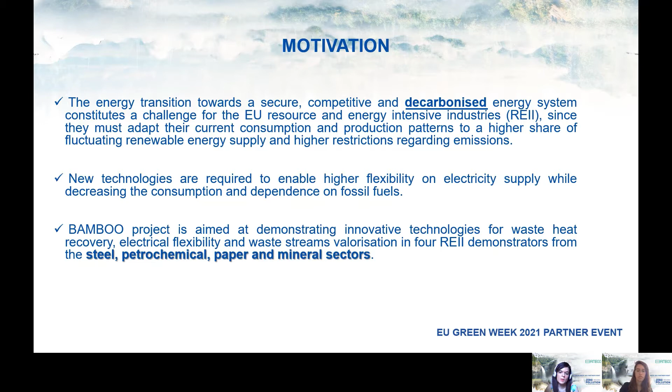In this sense, Bamboo project is aimed at demonstrating different innovative technologies for waste heat recovery, electrical flexibility, and waste streams valorization. We are working in 4 energy and resource intensive industries, including the steel, the petrochemical, the pulp and paper, and the mineral sectors. So how does Bamboo project contribute to decarbonization? We are working in 3 innovation pillars: waste heat recovery, electrical flexibility, and waste streams valorization.

The first one, waste heat recovery, includes the demonstration of different technologies to valorize waste streams because they have a certain temperature, so that we can valorize them and use them where they are required in other parts of the process.

The second innovation pillar is electrical flexibility, to offer industries the possibility of taking advantage of lower electricity prices and potentially provide grid services, as well as enable the integration of renewable energies in the grid.

The third one is waste streams valorization. We work on different technologies and processes for the valorization and upgrading of waste streams that have a certain calorific value, so they can be used as fuels in other processes in the plant.

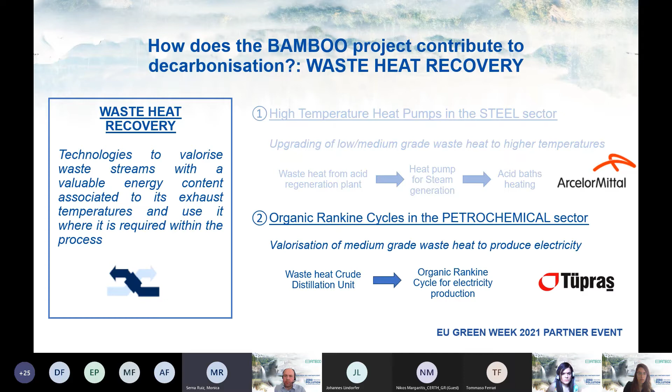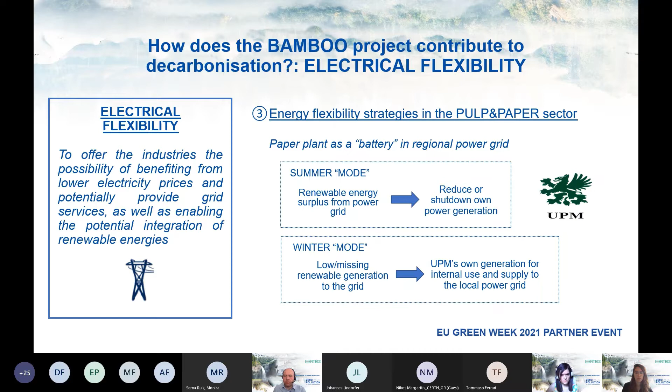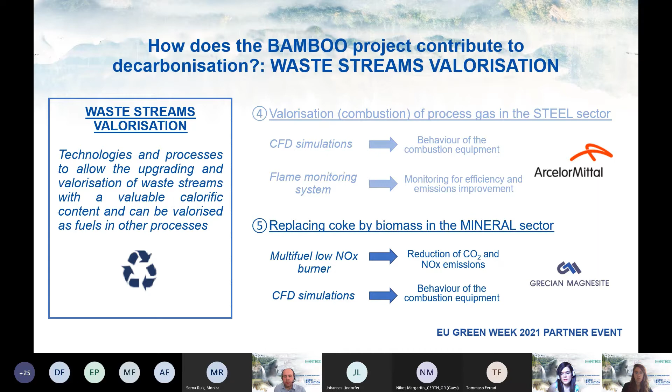So this is more or less an overview of the different technologies and demonstration activities developed in the project. Today we have two sessions for subscribers to further understand what we are developing in the project.

In the morning session, our expert speakers from the Austrian Institute of Technology, Turboden, Technical University of Braunschweig, Certh and Circe will explain how these technologies work and how they can contribute to the decarbonization of energy and resource intensive industries. During the afternoon, we have a second session where our industrial partners will explain their experiences and the successful cases being developed in this project.

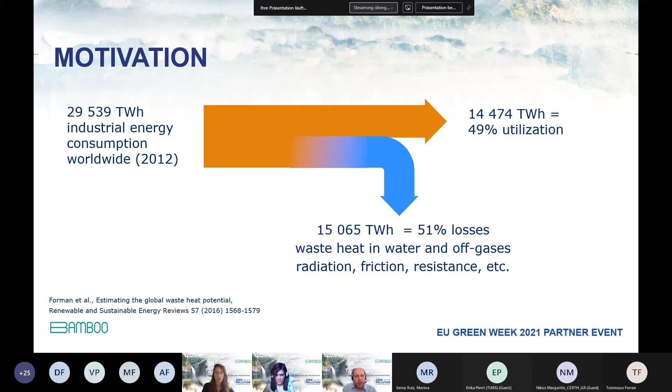What you can see on this slide is data from 2012, from a study done some years ago. What we are doing is using this low temperature heat, bringing it to a so-called high temperature heat pump or industrial heat pump, using a little bit of electricity to lift the temperature of the low temperature heat to a level where it can be used again in the industrial process. That's the general principle, and it's somehow a circular energy use.

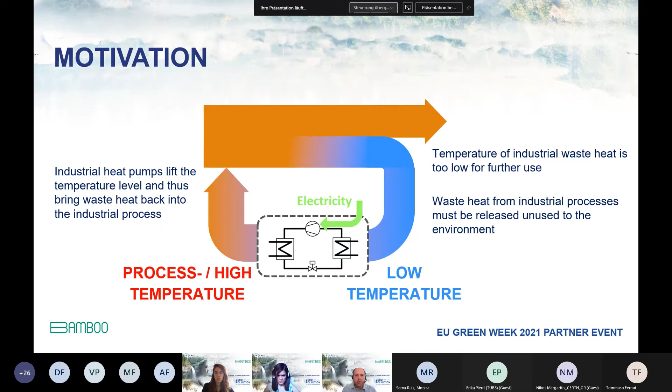What you can do with it is save CO2 emissions, save primary energy, and at the end save money. The challenges we are facing are divided into two main areas.

The ongoing development of industrial heat pumps and the demonstration and training of it, coming to the principle of a so-called compression heat pump. There are different names: industrial heat pump, compression heat pump, or high temperature heat pump - it's always the same. On the left-hand side, you can see the low temperature waste heat, which is given to a working fluid.

This working fluid, also called refrigerant, is then evaporated and compressed in a compressor using electrical energy, brought to a high temperature and high pressure, where the heat is given to the process heat and can be used again. This is a so-called closed circuit, as the refrigerant is brought back to the evaporation process - that's the principle we've been working on for some years.

The other challenge is for our future process heat supply, we have different requirements. The process heat supply in the future will need to be more efficient, also according to European regulations. We have to decarbonize the process heat supplies, and this decarbonization comes mainly with electrification. I will come back to this point with statements from some studies.

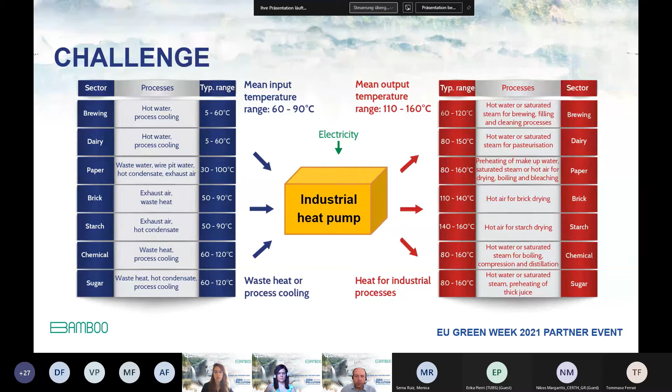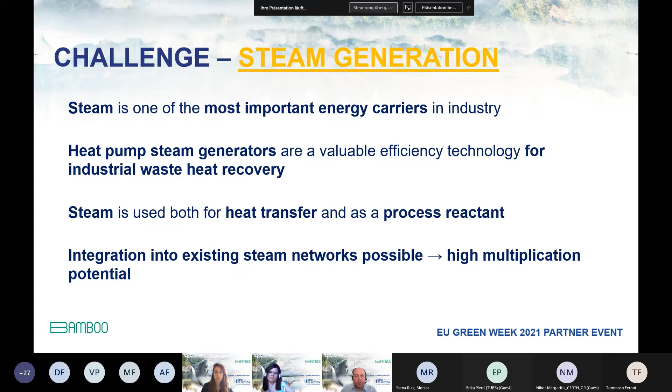First of all, the steam generation. So why heat pumps for steam generation in general? This is why steam is one of the most important energy carriers in industry. It can be used for heat transfer as well as process reactant. And you mainly have existing steam networks where you can integrate high temperature heat pumps, where you have a high multiplication potential. That's for steam generation.

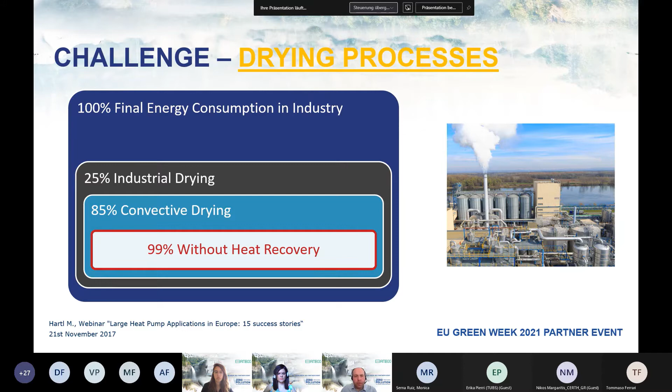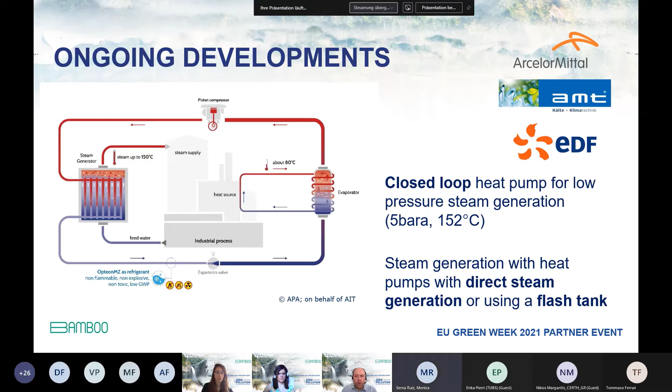I'm showing this to you from the project DryEfficiency, which deals with the efficiency of drying processes up to 160 degrees C. These two technologies are used, and in parallel we see the market for closed loop heat pumps developing, now reaching up to around 120 to 130 degrees C supply temperature. So there's still a difference between the scientific and research point of view and the market, but we see a very strong development on the market with high temperature heat pumps.

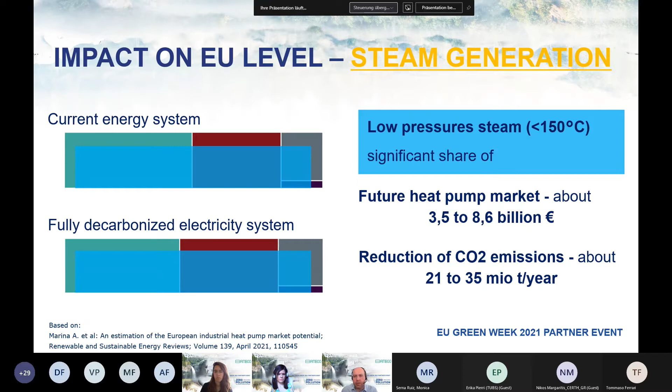They also use a top-down approach with statistical data from the European Union, and a very unfavorable share of emissions for the electrical energy system, taken from standards with much higher values than the EU average. I guess that's the reason why it's called very conservative.

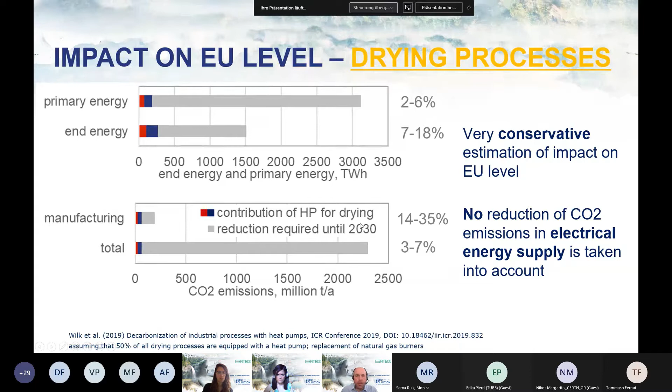Coming to my nearly last topic, the world market outlook. It's a pretty new study from the International Energy Agency with a very interesting part on the industrial energy systems of the future. It's mainly two slides for today.

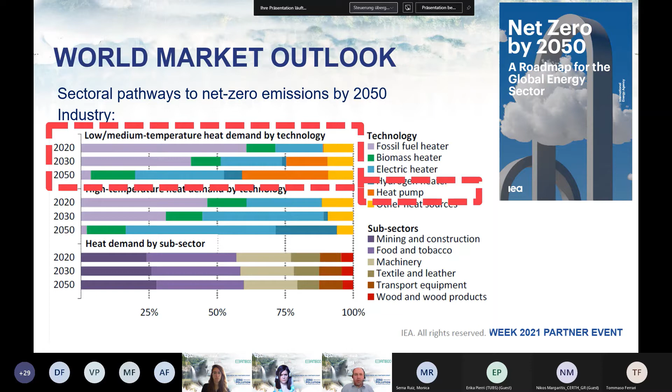Just to give you a sentence out of this study, which is very interesting: the International Energy Agency estimates that for low and some medium temperature heat, electrification includes an important role for heat pumps, for decarbonization. They also estimate that around 500 megawatts of heat pumps need to be installed every month in coming years, so in the next 30 years. That looks for a very interesting market share in the future. So that's my main message from today.

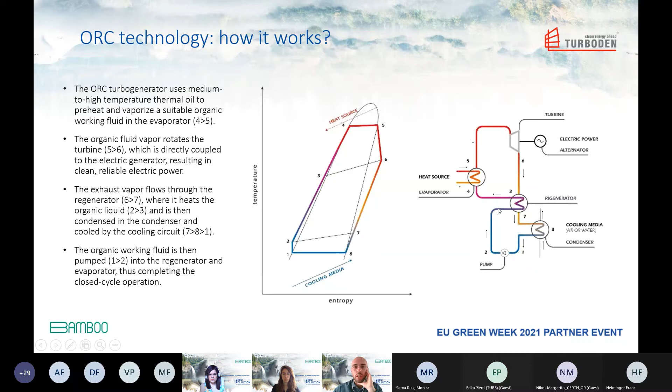Downstream of the turbine, we have a couple of components. One, called the regenerator, does internal heat recovery and enhances the overall efficiency of the cycle. Then we have a condenser, where the heat that cannot be converted into electricity is dissipated to the ambient, either through a water loop or directly to ambient air. So basically, the overall functioning of this cycle is very similar to a steam cycle. The main differences come from the features of the organic compounds that an ORC cycle uses instead of water.

In a steam turbine, we have a high enthalpy drop, and due to the fact that the curve of water has this bell shape, the last part of the expansion, around point 4, can be somehow problematic, since it can finish either in or out of the two-phase region, depending on the actual conditions of the cycle itself. This is something characteristic of water.

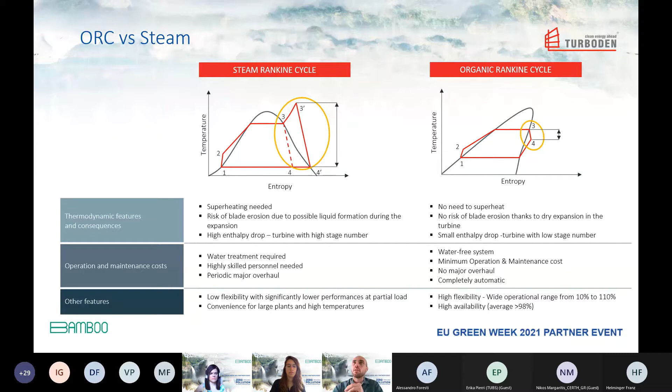Of course, this is an important aspect when we talk about heat recovery from industrial processes, where the industrial process has its own operating schedule that can vary during the day. So basically, following a variable load with an organic Rankine cycle is typically easier compared to a more traditional steam turbine, since it is quite easy to adjust the evaporating pressure of the organic Rankine cycle to follow the heat available from the heat source.

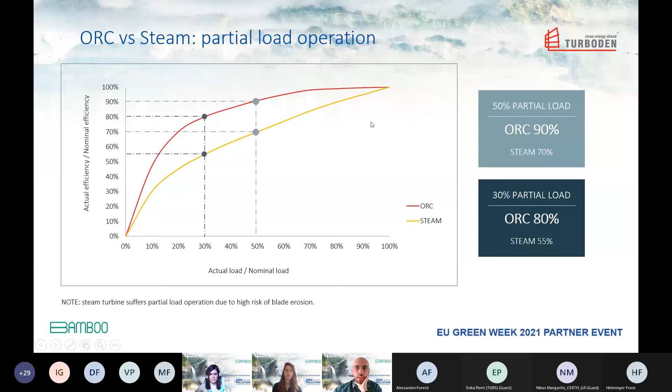At the end of the day, organic Rankine cycle technology is a power generation technology capable of receiving thermal power from a heat source that can be, let's say, any source, and turning this thermal power into electricity in a very simple and flexible way. The fact that the loop itself is a closed loop using an organic compound means there is no use of water within the organic Rankine cycle, so there is no need of any water supply to the plant, especially if we are considering a dry-cooled solution. This might be interesting for places where the water supply is problematic.

Further to this, the system is generally quite simple in terms of components and in terms of management of the partial load. The system is fully automatic, so there is really an ease of operation associated with the plant, which is again interesting if we are talking about heat recovery in industry, where the industry has its own manpower dedicated to the industrial process, and typically we don't want to spend time on the technology that does the heat recovery part.

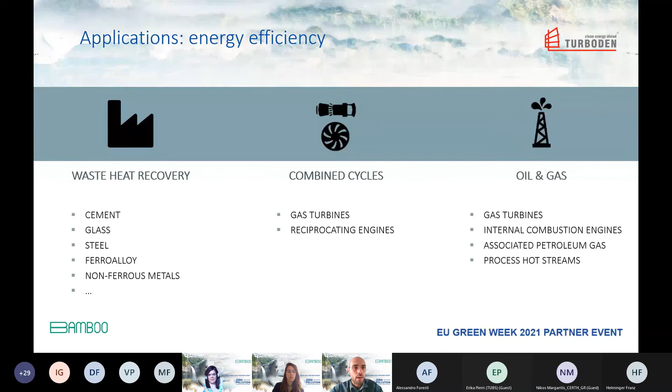As I said, in renewables we talk about geothermal, biomass, and waste to energy. The idea for all these applications is the same. We have thermal power available from a certain heat source, and we can build an organic Rankine cycle to exploit this heat source and produce power. Depending on the temperature and the amount of thermal power available, we can adapt the characteristics of the ORC unit and plant that we can build, but the mechanism is always the same: we have thermal power, we take this thermal power, we convert part of it into electricity, and we reject some heat to the ambient according to what is the efficiency of the cycle itself.

So concerning geothermal application, the main heat source is geothermal water coming from the underground.

Depending on the characteristics of the geothermal reservoir, we have different solutions, but generally speaking, any geothermal resource from 100 degrees C and above is a possible geothermal resource that can be used. The most preferred solution for these plants is an ORC using air-cooled condensers, so not requiring water for cooling. But again, different solutions are available.

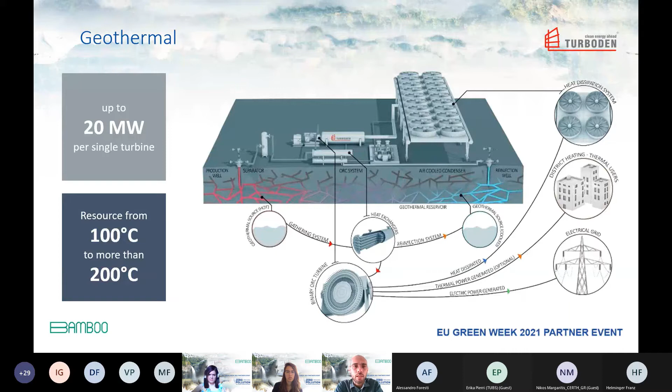I will go quite fast on this since the idea is quite simple. It's just some slides with examples.

In biomass, the heat source changes from the geothermal reservoir to waste biomass available in sawmills or panel factories and so on. Many industries that process wood have wood waste. One possibility is to burn this waste biomass in a boiler and use the thermal power to feed an ORC unit to produce power. The most interesting configuration for the ORC technology in this case is a CHP configuration, where the ORC produces power but also rejects heat to water at 80 degrees C, so that this hot water can be used by a thermal user requiring relatively low temperature, such as a drying process. This schema is typical of sawmills and other industries using wood or biomass in their processes. On the right you can see examples of biomass fuels we have used in our plants.

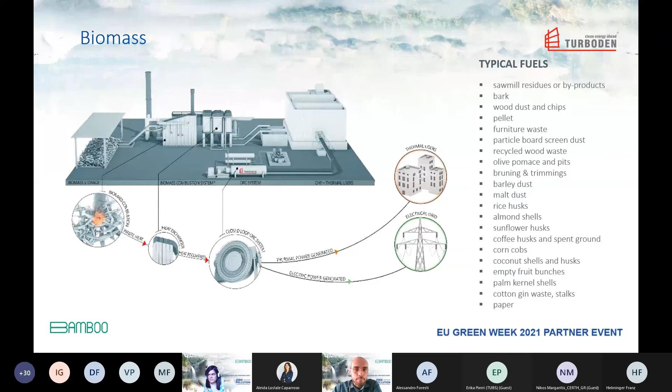Waste to energy is the same concept as biomass, just using waste. We see this as a growing sector, since waste is one of the problems of our time, and the disposal of waste is a big topic.

We have ORC plants working downstream of big incinerator plants, as well as small ORCs using the solid waste directly as fuel, similar to biomass, just replacing it with landfill waste and so on.

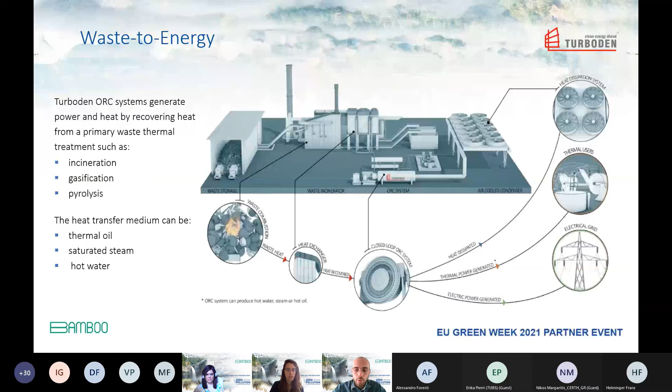Stepping to energy efficiency applications, there are industries with high temperature processes that also produce high temperature exhaust gas, which can be exploited as a thermal power source to feed an ORC unit. The main industries here are cement, steel, glass, and oil and gas, which is a quite broad sector with many different processes. We will have a dedicated session on oil and gas in the afternoon.

The concept is quite similar to what we've seen before. We need something to capture the available thermal power and transfer it to the ORC unit. There is an interface between the production process and the ORC, called a waste heat recovery unit, typically producing thermal oil used as a heat carrier. This thermal power then goes through the heat carrier to the ORC, which produces power.

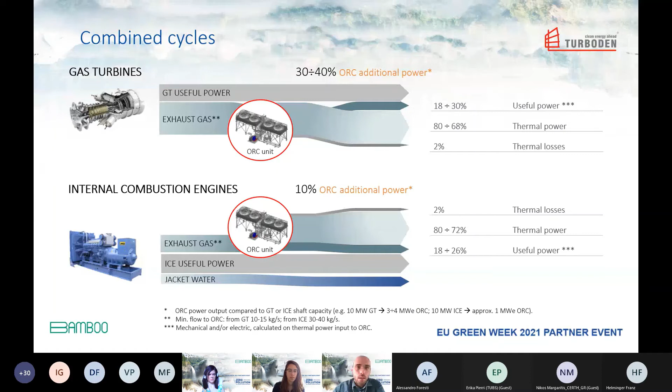So this was just to give you a bit of an overview of the possible applications, some example projects to have some numbers also, and not just general concepts. Sorry Thomas, there is only 1 or 2 more minutes. Yeah, but it will be very fast, just 2-3 slides to show some examples.

Since the Bamboo project is mainly focused on decarbonizing industry, here is an example for a cement plant in Turkey, where the clinker production capacity is 10,000 tons per day. By recovering heat from the exhaust gas of the cement process, the ORC size is 7 megawatts. Running this for 8,000 hours per year and comparing with the intensity factor of Turkish electricity generation, you get a quite interesting amount of possible CO2 savings - this project saves about 25,000 tons per year.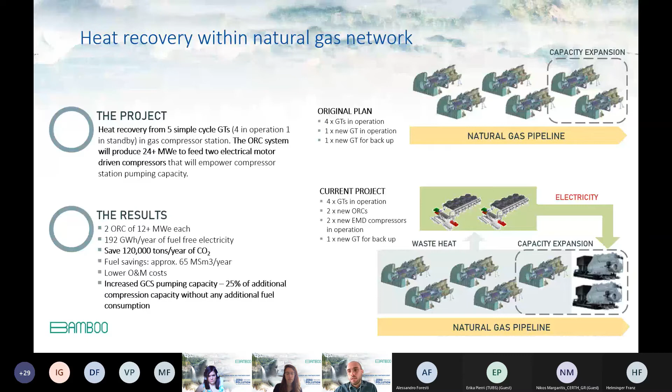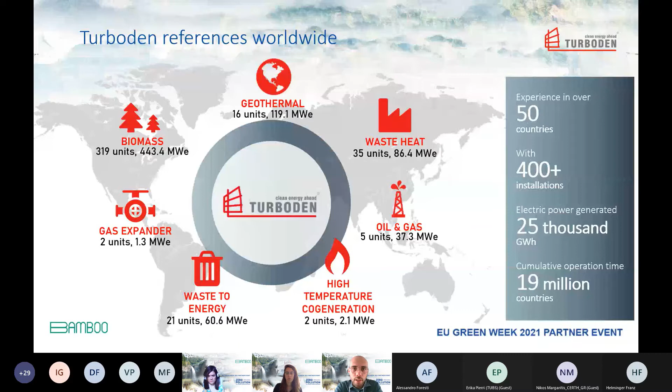Here, the last slide of my presentation, just to give you an idea of the projects that Turboden has developed in its history, and how they are divided among the various applications that we have seen today. With this, I have concluded my presentation, and thank you all for the attention.

I guess that for questions we will have a dedicated part later on, right? Yes, we have a dedicated part at the end. There is in fact a question concerning your presentation, Tommaso. Okay, so we can better move with Erika, and at the end we can do the question and answer session. Okay, thank you.

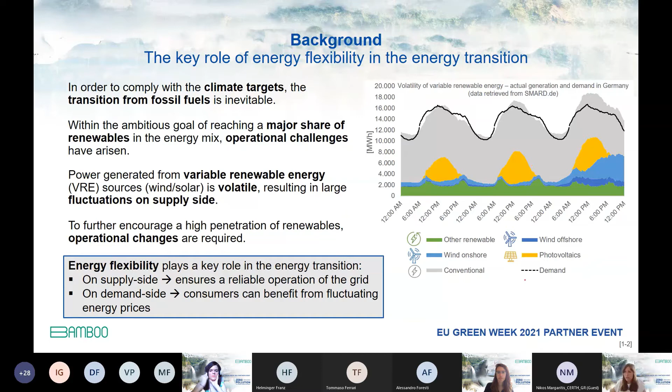So as you see here, there would be a high potential to integrate renewable energy. If we have a higher amount of renewable energy in the grid, we could also integrate those energies in the production sector by substituting the fossil generation plants. This integration of renewable energy is a really promising solution towards carbon neutrality in the industrial sector.

If we now have an overview of the different types of flexibility in general in the power system, we have mainly direct and indirect types of flexibility. The first type is direct flexibility, which occurs directly on the supply side by flexibilization of the power plants or curtailment of renewable energies. This type of flexibility is already implemented, already occurring today, and is quite cost effective.

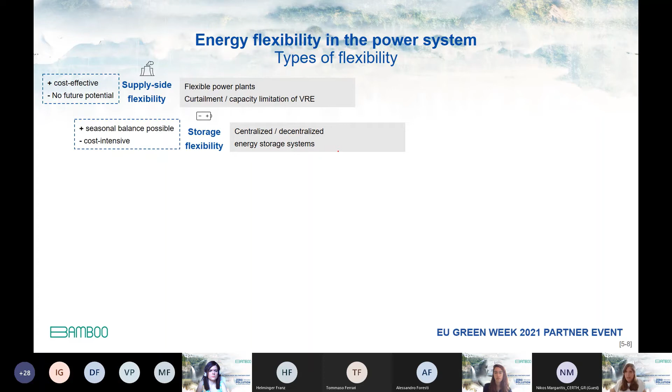If we want to now look at more recent flexibility technologies, we have storage flexibility that can be enhanced through centralized or decentralized energy storage systems. This is still cost intensive, but it allows seasonal balances.

Another way to balance imbalances in the grid is to expand the transmission or distribution networks or develop smart grids. This would be the flexibilization of the transmission grid itself. This, of course, is also intensive because it comes with expansion of the grid, but it allows us to reallocate a surplus of energy between regions.

Then we have a fourth type of flexibility, the demand-side flexibility, with terms you might have heard such as demand-side management and demand response. This can enhance grid stability. So from the consumer side, we can support the stability of the grid, but here we need operational changes in the production sector.

The final type of flexibility we can mention is the so-called intersectoral flexibility, which can be enhanced through technologies categorized as Power-to-X. This is also a way to enhance grid stability and to increase sector coupling.

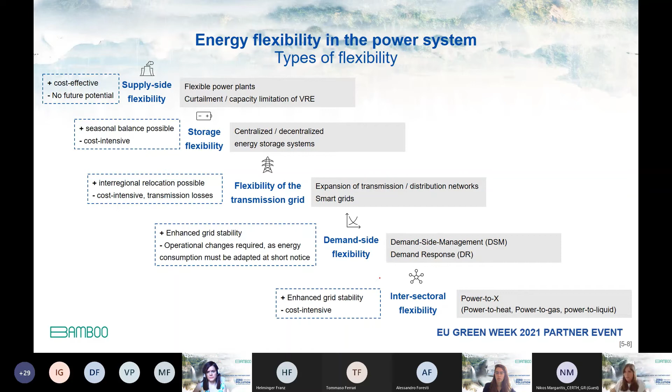Now that we had an overview of the types of flexibility in the power system, we can focus on the production system. We can define energy flexibility of a production system as the ability to react to changes in the electricity supply rapidly, with low financial effort, and without compromising product quality. In the production sector, there are three dimensions of flexibility that we have to take into account when implementing flexibility strategies.

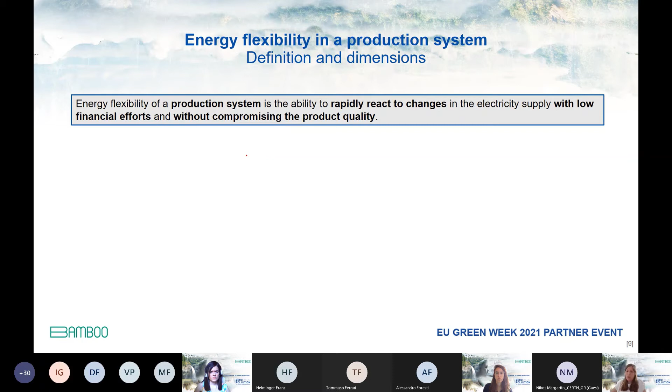The first dimension is the state dimension: we need to adjust the operational state of the machines or assets, and so adjust the power demand. The second dimension is the time dimension: when implementing flexibility strategies, we have to take into account the time frame it takes to implement the strategy. Finally, of course, this comes together with some costs that should have a positive impact.

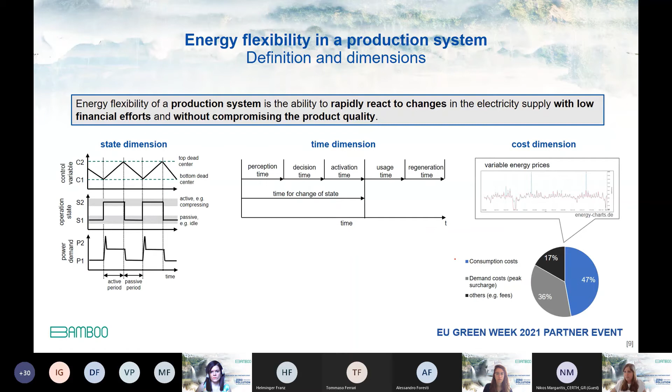In a production system, we can also distinguish between different types of flexibility that directly or indirectly affect the performance of energy flexibility. The first type is the so-called volume flexibility. For instance, we could change the output quantity by reducing the number of products that are produced.

We can also change the route, for instance switching off a machine and using another machine to produce the same product. We could think about adjusting to market demand, producing alternative products—though if we do that, we also have to adjust the machines for these new products. The final type of flexibility is a rather organizational strategy: to reorganize the working hours and the schedule of the personnel.

So the so-called personnel deployment flexibility.

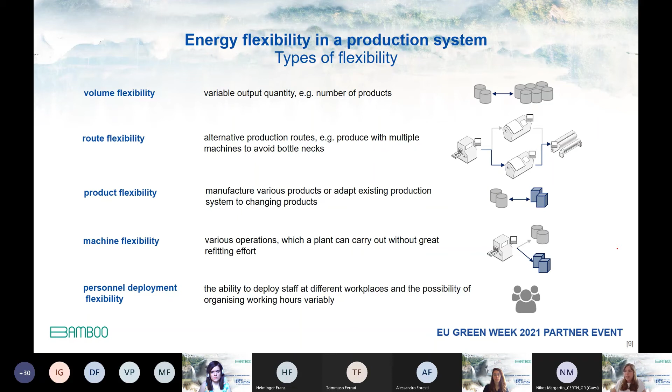Now that we've had a look at all these types of flexibility, we can see that if we want to implement or enhance them, we need different strategies. Here I want to give you an overview of what these strategies could be. First, when we want to implement flexibility strategies, we can do that at different levels of the manufacturing system: the manufacturing system itself in the factory, which is the lower level of the pyramid; then the upper level, operation and control; and then business planning and logistics. The higher we go in this pyramid, the longer it takes to implement a flexibility strategy. So here we give a short overview of each level.

At the manufacturing level, we could think about interrupting some processes within a minute to hour time frame, or changing the process sequence. If we go up a level, strategies might take longer, from days up to weeks, such as interrupting the process for longer time frames, storing energy, or changing the energy source. At the last level, moving to logistics and longer-term planning, we could change the production order, adapt the machine loads, or adapt the shifts.

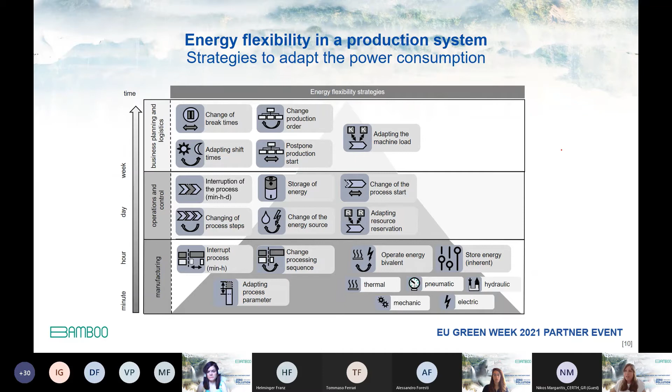As you see, we have different strategies that can be implemented, and these strategies are defined for a production system in general. But if we want to really assess the implementation potential, we have to take into account some restrictions that must be considered.

Now that you have all these definitions and have learned about the different flexibility types, I want to explain the challenges of implementing energy flexibility in energy-intensive industries.

To do that, I'd like to first explain the difference between general manufacturing systems, discrete manufacturing, like the automotive industry. Here we have input products that come from other manufacturing processes, such as parts of a vehicle. Then there's a reversible assembling of this vehicle, and the final output is, for example, the car.

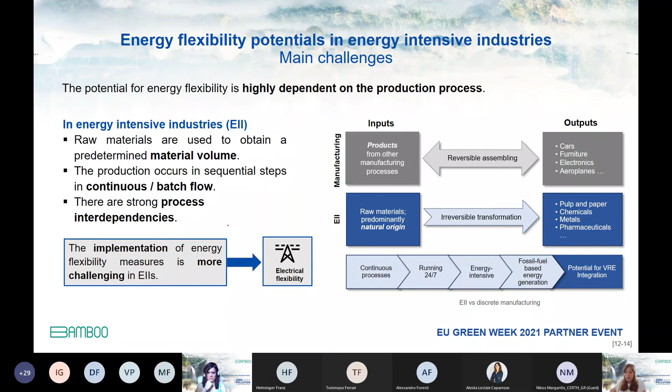This is what we have been doing in the second pillar of the Bamboo project, the electrical flexibility pillar. Here I'd like to give you an overview of three main strategies and technologies that are most promising in energy-intensive industries. The first is the so-called demand-side management that I mentioned before in my presentation.

Demand-side management can be defined as a set of customer-end strategies to provide flexibility in the balancing market, either by decreasing demand through strategies like peak clipping or energy efficiency, or by shifting energy consumption through valley filling or load shifting—in general, flexibilizing the shape of the load.

Energy-intensive consumers have a constant and high base load, as I explained in the previous slide. The energy-intensive industry offers really high potential to serve as a capacity reserve for the grid.

So if we want to increase the share of renewable energy, both in the grid and in the industries, we have to take into account the main challenges that come with integration of renewable energy. That would be the temporal variability, as I showed in the earlier slide, the uncertainty, the geographical variability, so they really depend on the location and on the weather conditions. They're usually decentralized and non-dispatchable. So if we integrate renewable energy in energy-intensive industries, the operator has to cope with this lack of controllability and reliability of supply that this might bring.

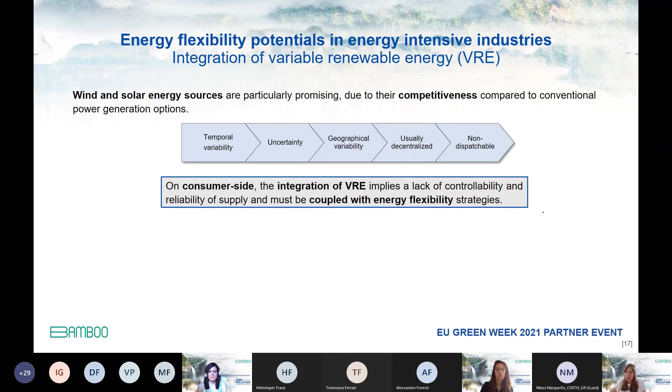So if we then couple the integration of renewable energy with energy flexibility, not only on the grid side but also on the demand side, so on the production system itself, this would enhance better or more reliable operation of both the grid and the industrial process.

And there are two ways we can think about for integrating renewable energy. The most common way would be to install new assets on site, so a photovoltaic panel or a windmill. But an even more promising solution would be to acquire excess renewable energy that is already available in the grid, substituting on-site fossil fuel plants with this excess renewable energy through contracts such as power purchase agreements. You will hear more about this in the afternoon session from the UPM case.

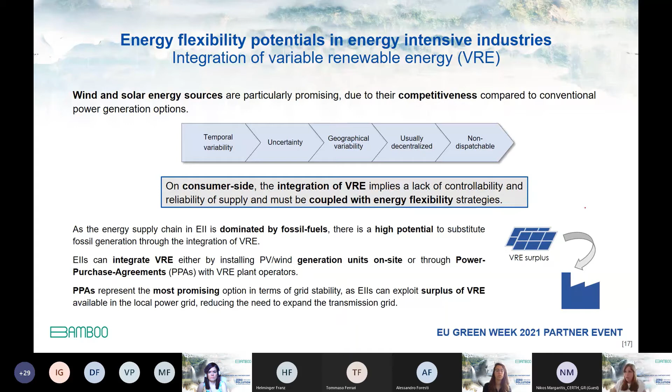Another technology that can enhance flexibility and, more specifically, demand-side management is the installation of energy storage systems. These can be classified into mechanical and physical, such as compressed air or pumped hydro; electrical, such as capacitors and supercapacitors; electrochemical, which are more common, like batteries and fuel cells; and thermal energy storage as well.

The way this helps support demand-side management is that in times of lower costs, or when we have higher availability of renewable energy, we can charge the storage system. Then in times when prices are higher, or we don't have availability of renewable energy, we can discharge the system and use this energy in the production process.

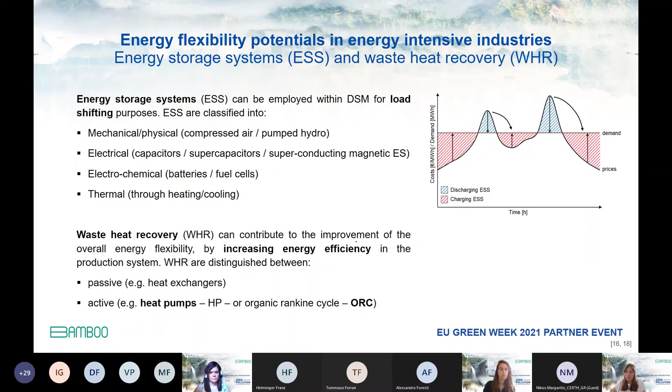Another technology already mentioned by my colleagues in the previous session is the integration of waste heat recovery technologies to increase energy efficiency. As you might remember from the picture I showed before about demand-side management, energy efficiency also indirectly affects overall energy flexibility. This was what was done in the first pillar of the project, so I won't go into the details here.

If you're interested in the assessment, you can have a look at the reference. You can find it in the reference list — it was a publication we published within the project.

Now just a general overview of the activities carried out in the project in the context of energy flexibility. The main focus of electrical flexibility was in the pulp and paper sector, where we carried out different activities. In the early stage of the project, we focused on identifying energy hotspots and also the potential to recover process heat to, in general, boost energy efficiency.

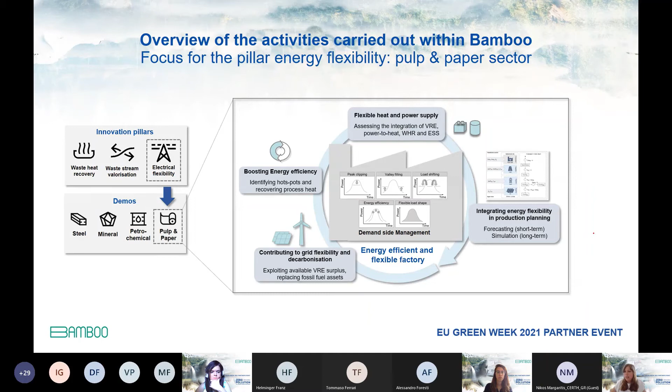With these activities we are performing, we are trying to contribute to grid flexibility and also to decarbonization of the industrial sector. You will hear more about all these successful cases and results in the afternoon session from the UPM case study in the pulp and paper sector.

So what are the challenges and opportunities of energy flexibility in energy intensive industries? The main challenge is that, as you have seen, the applicability of this action is very complex in daily practice, and it requires real changes in the production sector. When we think about installing new energy assets or storage technologies, the investments required are still very high.

Besides, storage technologies come with high environmental impacts. On the other hand, if we integrate renewable energies and substitute fossil fuel generation, we would have higher environmental performance in the energy supply chain and consequently in the production process. Consumers can benefit from lower energy prices and can create new business models for the energy supply system.

Here I come to the conclusions of my presentation. As I was mentioning in the beginning, if we want to reach the ambitious climate targets, we need a transition from fossil fuels to renewable energy. This transition comes with operational challenges in the power system that can be overcome only by increasing the overall flexibility of the power system.

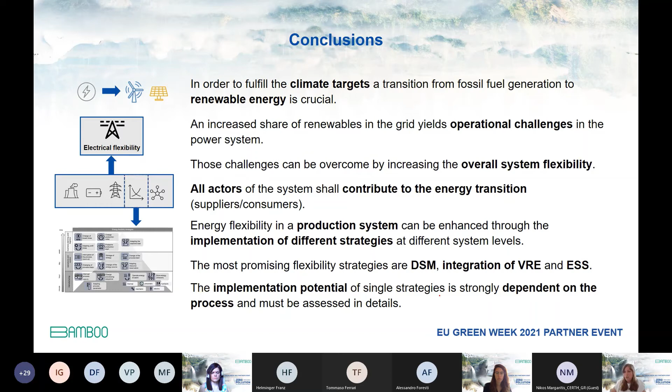The most promising strategies I have mentioned were demand side management, integration of renewable energy, and energy storage systems. But in order to implement those strategies in energy intensive industries, we have to take into account that the strategies are really dependent on the process, and we have to analyze the production process and its characteristics in detail. That's basically what we have been doing so far in the context of energy flexibility in the Bamboo project. Thank you for your attention, and here I leave you some references for further reading.

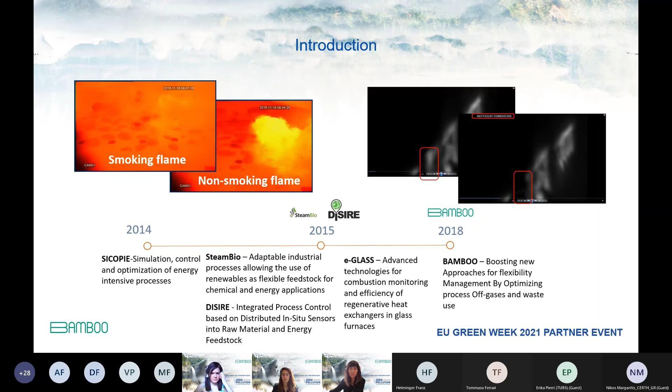And during this year, we have been working with different fuels, with natural gas, and also with blends with hydrogen, and also with coal and torrefied fuels. Thanks to the experience, we are part of the Bamboo project. In this project, we are working in the waste stream valorization pillar, in particular in the steel sector.

The energy intensive industries are exploring different approaches to achieve the decarbonization of the sector, and it's a very challenging objective. In the Bamboo project, the idea is the introduction of new fuels for combustion to generate energy. In this case, process gases are used for this aim. This kind of new scenario can present and generate some uncertainties on how to manage these new fuels and so on. The flame monitoring system that we are developing intends to support this new scenario, this new fuel combustion.

So the goal of this technology is to increase the efficiency of the process, and of course, a reduction that leads to a reduction of emissions. How can we get that with this technology? Thanks to that, we are going to control the combustion more precisely, and thanks to this tool, we can detect malfunctions and inefficiencies in the burners, and also we can reduce fuel consumption, and in that case we can help reduce the uncertainties that arise in this application.

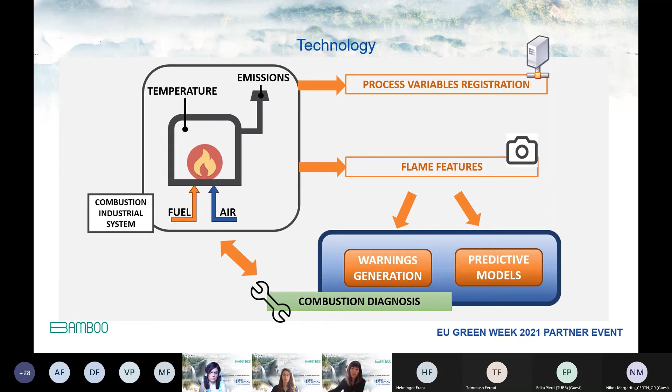Let me explain the technology itself. This is a sketch of a common general industrial combustion system. You have different parameters that you can measure, such as temperature, flow rate, airflow rate, emissions, and so on. In our case, the technology integrates a visualization system to see what is happening inside the furnace with the flame. This technology can automatically analyze the behavior of that flame and generate a huge quantity of valuable information used to improve combustion control, because with warnings and predictions, the combustion will be diagnosed.

This work in the Bamboo case is being applied at two different scales. We are working at laboratory scale in CIRCE facilities, with a research-type environment to go deeper into the combustion processes, and we are also working at a semi-industrial scale at Arcelor facilities.

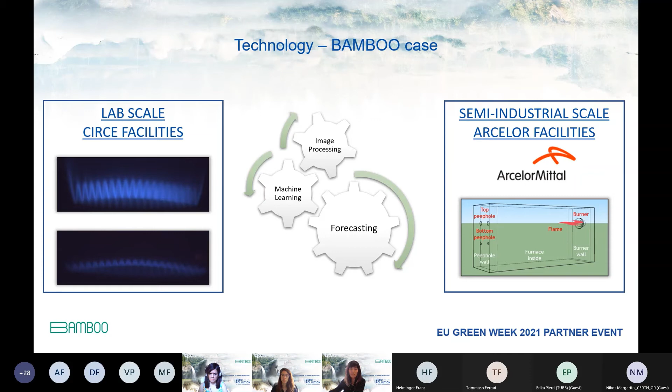This technology meets the decarbonization of industry through the digitalization of combustion processes, and allows the industry to advance to Industry 4.0. The use of machine learning models and image processing can help detect combustion inefficiencies and optimize combustion by generating warnings and alarms that can be used for better management of these processes.

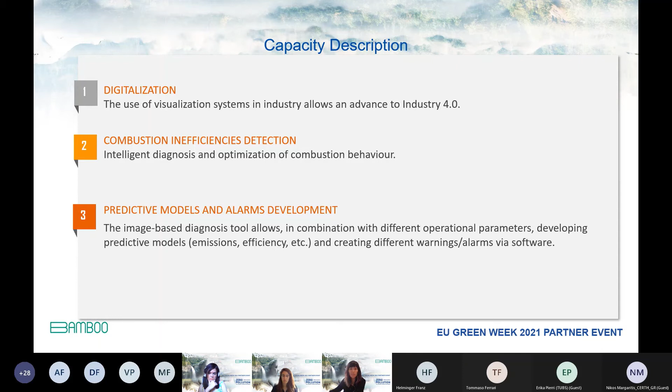The benefits of this technology are focused on cost reduction, because the optimization of this process can lead to a reduction in fuel consumption, and also allow lower pollutant generation.

Finally, this technology increases the safety of the operators, because at the end you have eyes inside the furnace and you can see what is happening. Warnings and different key parameters can be provided to the operator in such a manner that visual inspection can be diminished. So for all these reasons, we can say that this technology meets the objective of a zero emissions industry.

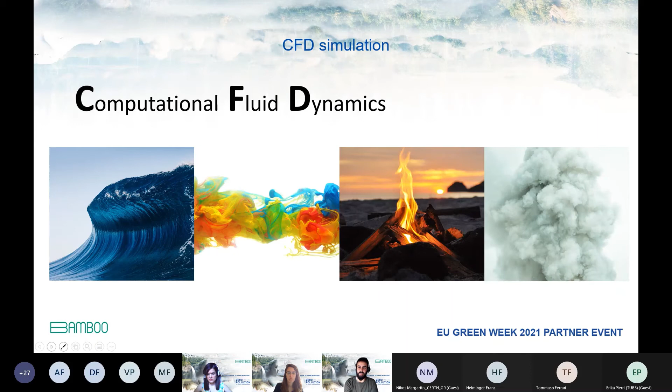We can model combustion, transient phenomena like flame liftoff, or steady state radiative heat transfer. We can also model pollutant formation, which is particularly interesting in a case like the one covered by Bamboo, which targets reducing emissions.

So actually, CFD is not new. The equations underlying all these phenomena have been terrifying or exciting engineers and scientists for two centuries now. Even though the Navier-Stokes equations are still unsolved, and in fact, the Clay Mathematics Institute named them one of the seven most important open problems in maths, offering a prize of one million dollars for whoever finds a solution or a counterexample of these equations.

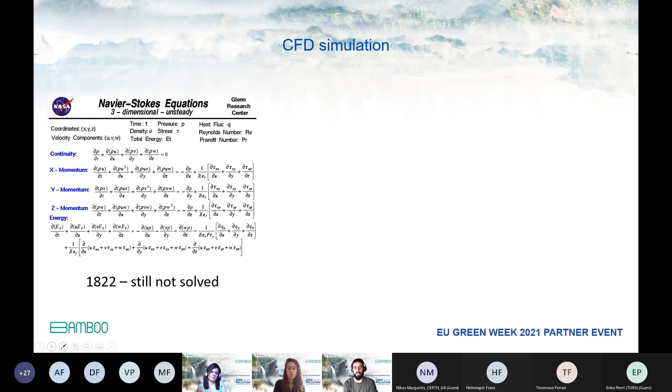So since 1822, a lot of things happened. First, in case you finish this talk with fluid dynamics, you can have these equations imprinted on a t-shirt. But anyway, I'm not going to get into capitalism this early in the morning.

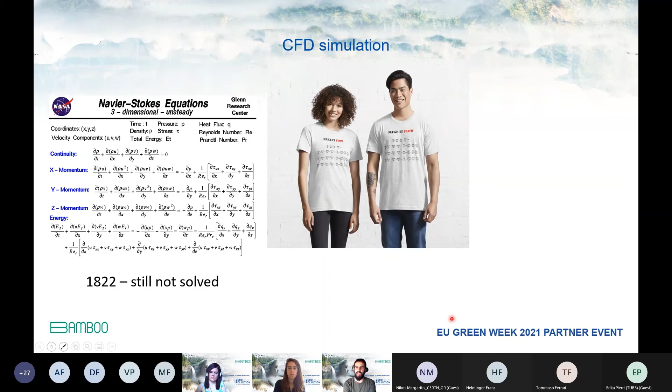The second one, and most important for us today, is computing. Even with the current shortage of semiconductors, computation has become cheaper and much more powerful, allowing CFD geeks to model and solve their problems much faster, much cheaper, and targeting bigger and complex installations such as the ones found in industry. This development of computers and solvers demonstrated that CFD is ready for industry, and, most important, is useful and cheaper than traditional experimental campaigns and design cycles.

The virtual models that we develop with CFD give a complete picture of the inners of processes and industrial assets, and they allow designers and plant operators to study different scenarios and modifications to achieve their goals faster, without risking their production or installation.

So going back to BAMBOO, we'll try to explain how CFD has been used to reduce emissions and boost the flexibility of three different case studies for these three energy-intensive sectors, as was said during this morning, which are steel, mineral sector, and paper and pulp.

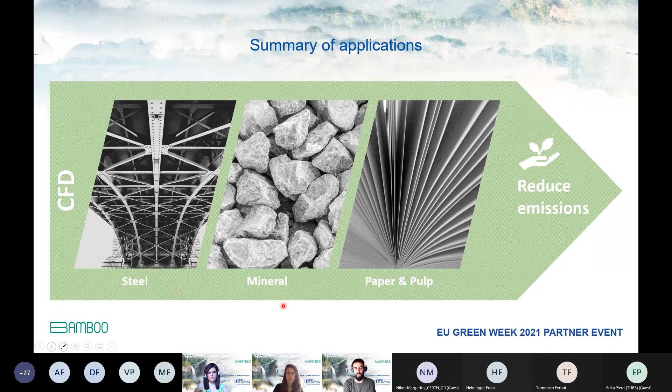At each demo site, we applied different approaches to reduce fossil fuel dependency. All of them go around combustion and how it changes when we modify the fuel. In the case of steel, we studied the effect of a residual process gas. In the mineral sector, we focus on biomass. And for paper, we increased the share of residual sludge with special interest in the moisture content.

Now I'm going to get deeper into each demo site and explain a little bit more what we achieved.

First, the steel sector. As my colleague Cristina already explained, we tried to replace part of the natural gas with one of the residual gases obtained in the plant. Together with ArcelorMittal, we ran an experimental campaign at a pseudo-industrial testing unit that they have there, and in that unit we ran this campaign and validated our models.

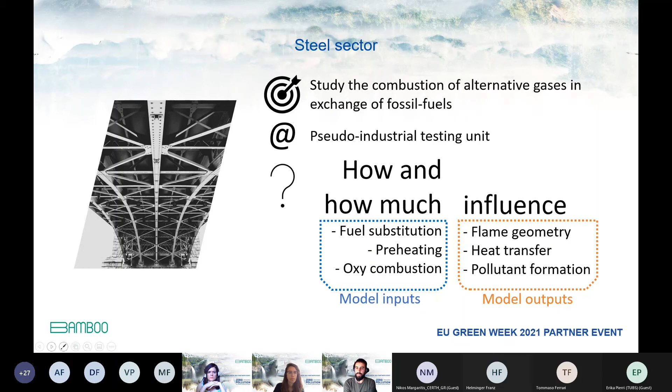Let's say Arcelor will need much more residual gas to achieve the temperature needed in the installation. In some cases, that's even more than the amount the installation could provide. In CFD, we don't mind those limits—we simply set the mass flow and study the results, then let the process engineers worry about how to achieve that flow.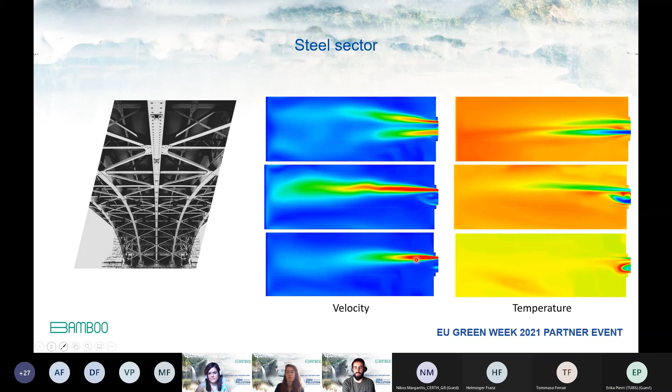Then for the mineral sector, Grecian Magnesites went for biomass to reduce coal dependency or coal consumption. In this case, the industrial furnace was used for trials and also studied in the CFD model. In that industrial furnace, different shares of biomass and different types of biomass were tried, and of course that also affected, or will affect, the flame geometry, heat transfer, and emissions.

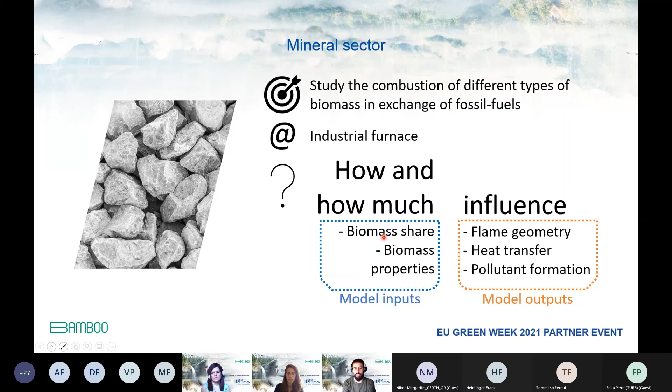If you find this interesting, you will love the next talk by Nicolas, because he's going to talk about these kinds of biomass effects. But I also wanted to include some images to see what we are talking about here.

Here you can see a sample of the temperature contours obtained in the installation—once again, sorry, but no legend or geometry is available. Thanks to CFD, we can study the current situation and then introduce more and more biomass while trying to keep things the way they were with coal, before those changes.

So let's suppose that here in the middle, we have the current situation. Above that, we have one of the biomasses tried with different shares. And on the bottom, another type with different shares. That way, we could analyze the results and find several cases which should be considered similar to the original case and which are interesting to be tested, or even not to test because they could be really risky for the installation or could damage the furnace.

So as I said, you should listen to Nicolas if you are interested in this biomass process.

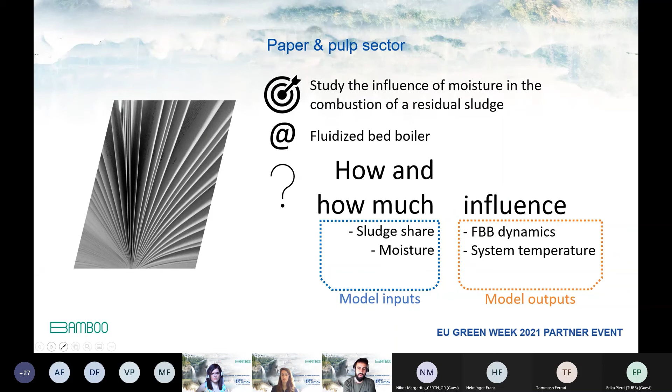So, well, that's what we are trying to solve by means of CFD. The fact here is that even with powerful computers and all of that, not everything can be solved with the required precision, at least not yet.

So this work is still ongoing, and we are trying to acquire data from that simulation and try to simplify as much as possible what's happening inside this fluidized bed boiler, to study and see how the different shares of this sludge and its moisture will affect its behavior.

What we are trying here is to model, even if it's an approach to the CFD or the complete problem, and then learn from those simulations and develop this kind of simpler model.

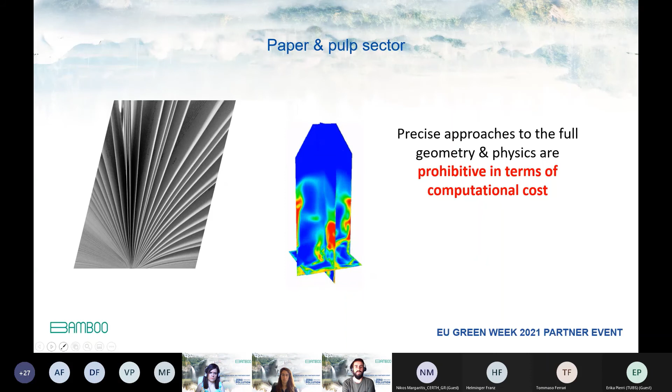And finally, now that you are all CFD experts, you could say, okay, but that's a classical CFD analysis of 3 different cases. So where is the innovation that a European project requires? And yeah, exactly, that's what we want to obtain goes further.

We are trying to develop this kind of ROM, reduced order models, which are, let's say, blocks or black boxes capable of obtaining real-time results upon input modifications. So let's say that when you have a ROM, you can specify some inputs and obtain the resulting outputs according to what you did before.

That's also a very challenging development, especially for combustion, because those ROMs require a large amount of studies and solver optimization to not waste so much computational time.

Our ROM creation starts from the CFD models that we were talking about and its validation, and then we have to run several cases covering the input variation ranges.

Then we use sophisticated algorithms to find hidden laws between these inputs and the outputs. And finally, what we do is obtain a standard format, easy to be plugged into a DSS or a control system, or even into a bigger digital twin of the plant, or whatever.

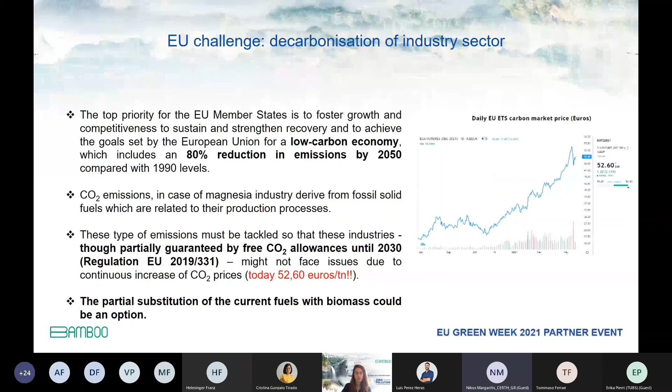The EU has started a progressive decarbonization with the aim to become carbon neutral by 2050. Energy-intensive industries are expected to play an important role in this transition, as they represent a big amount, 24%, of the final energy consumption.

Here we can see the short-term vision, meaning 2030, and the long-term vision, meaning 2050. The technology options for the short-term vision are conventional renewable heating through biomass, bioenergy carriers, solar thermal, geothermal, with a target to increase renewable use, but now it's below 50%. The long-term vision is to use conventional renewable heating and power, also new renewables, solar thermal, biosyngas, hydrogen in the mixture, and also synthesis fuels from renewable-based hydrogenation of CO2 capture.

So the target is to have 100% renewable use until 2050. You can see in the graphs that bioenergy offers the EU a reliable vehicle to achieve carbon neutrality by 2050, and here the evolution of the final consumption of bioheat by sector, specifically industry in EU28.

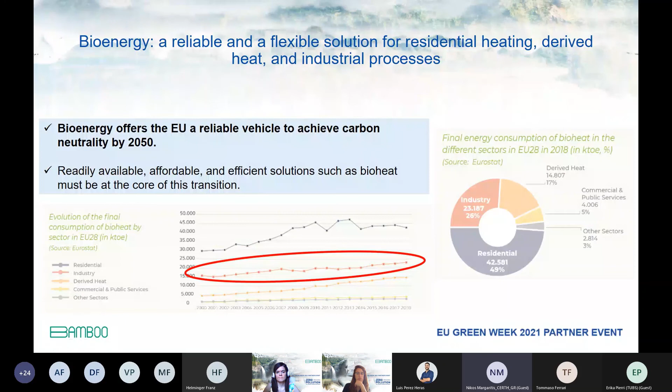If we see the European Green Deal call in Horizon 2020 and future calls, we realize that energy-intensive industries such as steel, chemicals, and cement are key to Europe's economy, and they account for 20% of EU's greenhouse gas emissions. It's worth referring to targeted impacts in Area 3, industry for a clean and circular economy, especially Impact 3, 4, and 5 that talk about reduction of industrial CO2 emissions, improvement of air quality, and contribution to industrial circularity in order to meet greenhouse gas emissions.

So biomass, as I told you before, would be an option because it has environmental benefits, economic benefits, but also some challenges that have to be faced more effectively.

Regarding the environmental benefits, when we use biomass, we conserve non-renewable resources, we reduce the waste disposal requirements. This contributes to lowering CO2 emissions because we replace a fossil fuel with biomass, and maximizes the recovery of energy from waste.

Also, there are some economic benefits when we use biomass, because burning biomass as a source of energy could save significant costs and save foreign currency by replacing imported fuels. There are also possible transport-related benefits if local alternative fuels replace imported fossil fuels. The cost can be lower if we use fuels that we have near the factory.

Then it is worth building a biomass supply chain in order to cover the needs of the factory. The challenges, although they exist in the biomass sector and it's very difficult to implement at full scale, include that usually the implementation of an effective fuel supply chain is difficult, in order to ensure needed quantities and the appropriate size of biomass, and also affordable cost for the final users. This always has some problems that need to be tackled in order to avoid future problems.

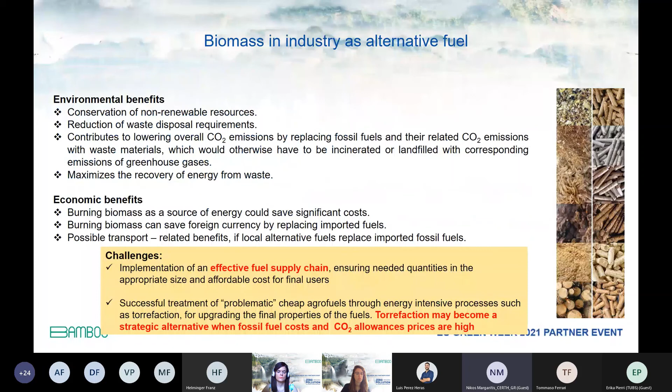Increased environmental performance at a modest cost is one of the drivers for biomass coal co-firing. Biomass usually has lower sulfur content than coal or coke, so co-firing results in a reduction of SOx emissions. Also, the addition of biomass can reduce NOx emissions, and the high volatility content of biomass can effectively establish a fuel-rich zone early in the flame, which also reduces NOx emissions.

Regarding the types of NOx emissions, we have three types: thermal NOx, fuel NOx, and prompt NOx. The concentration of thermal NOx is controlled by two factors: combustion temperature and the availability of nitrogen and oxygen molecules.

There are some techniques for NOx reduction. They're categorized as primary techniques and secondary techniques. Process optimization, improved firing technique, stage combustion, and better design are the primary techniques, whereas selective non-catalytic reduction and selective catalytic reduction are categorized as secondary techniques.

According to the BAT reference document for the magnesia sector, the NOx emission limit for the high temperature DBM process in the magnesia sector is 1,500 as a daily average value. But if NOx is left unchecked, emissions can be higher, almost 3,000 or more.

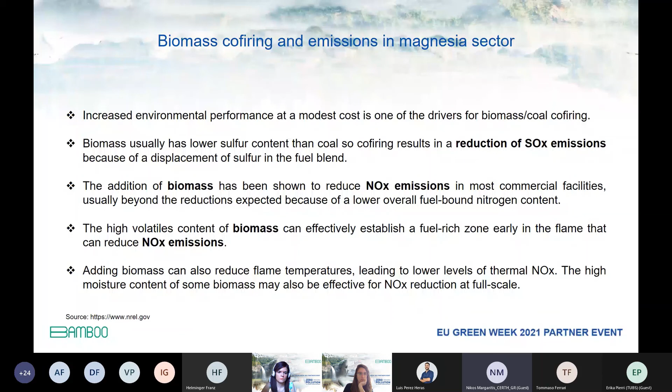Regarding secondary techniques, as I said, there are the SNCR technique and the SCR technique, but these are difficult to use because there is a required temperature window: 900 to 1100 degrees for SNCR, and 300 to 400 Celsius for SCR. So you have to be within this temperature window in order to achieve reduction.

This is the problem with the magnesia industry: you don't always have these temperatures in the flue gas in order to achieve the reduction. Among the primary techniques, an effective technology is the use of low NOx burners.

Regarding low NOx burner characteristics, let's discuss the main principles. It's a stepwise combustion process which delays the mixing and input of fuel and air at appropriate stages in order to achieve a controlled combustion process, resulting in a fuel-rich flame core and lower peak temperatures.

The first generation of low NOx burners applied to furnaces used the basic principle of air staging. Now, new generations of low NOx burners applied to heavy industrial furnaces use not only air staging but also fuel staging. This means they use very specific fuel injection points, which helps reduce NOx emissions even further.

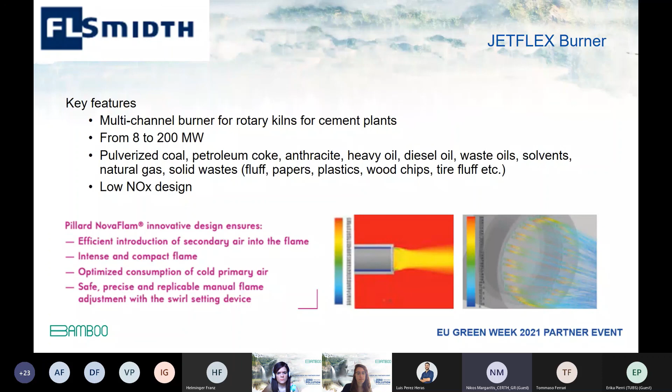The last category are burners with adjustable axial and radial primary jets in a single channel, with or without swirl. Swirl adjustment is a characteristic that can offer effective combustion, and different manufacturers have different choices on how to achieve this swirl and the relation of primary air with fuel and secondary air.

So to sum up, primary techniques such as low NOx burners are in principle applicable to most types of kilns used by energy-intensive industries such as cement, steel, and chemicals, promoting energy efficiency and contributing to the reduction of CO2 emissions through the use of green alternative fuels such as biomass.

However, some primary techniques used in other industries cannot be used fully in the magnesia industry, such as low NOx burners, because the magnesia industry has the characteristic that its products are produced at high temperatures. This type of burner, the low NOx burner, usually operates up to 1600 Celsius. But in the magnesia industry, when you produce DBM, you need temperatures above 2000.

So in the Bamboo project, a novel and versatile low NOx burner was implemented by GM in order to lower the respective emissions for temperatures up to 1600, but also be able to produce high enough temperature for the production of DBM.

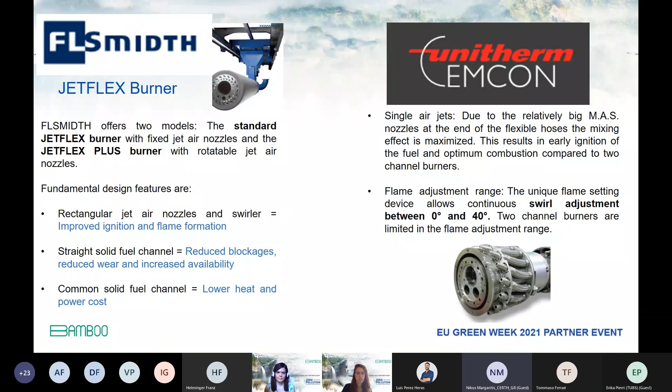So the new modified burner from GM, which Haris Giannulakis will present in the afternoon session, is able to combust mixtures of pulverized biomass and petroleum coke, having adjustable swirl to operate as LNB for temperatures up to 1600 in order to produce CCM. This burner can also be changed to normal operation mode if the company wants to produce DBM, which needs temperatures very high, above 2000.

That's all for me. Thank you very much for your attention.

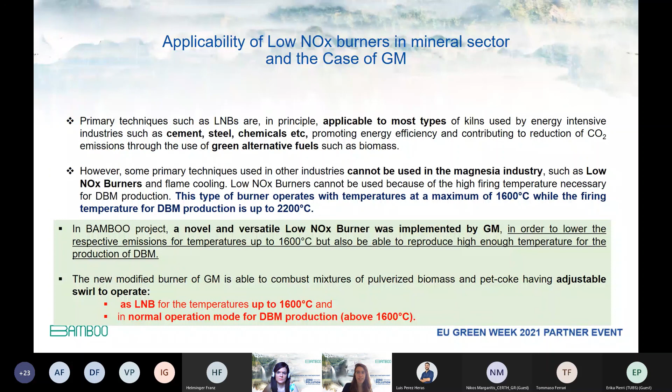We had one question from Mr. Prajapati to Turboden concerning the ORC. The question was if we can use biogas, gas generated from food waste, as a heat source for the organic Rankine cycle, and if the biogas will have sufficient calorific value to evaporate the organic fluid.

Okay, Tommaso, please answer this question from Mr. Prajapati. Yes, basically what we will have to characterize in this case is the calorific value of the biogas available, and also the quantity, the flow rate of biogas that is available, to understand how much thermal power there is in this fuel, and therefore what is the possible ORC size that can be developed.